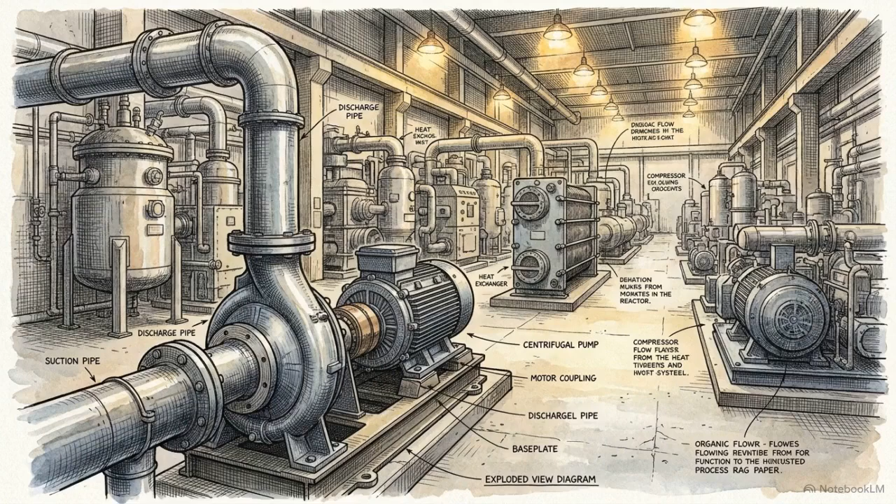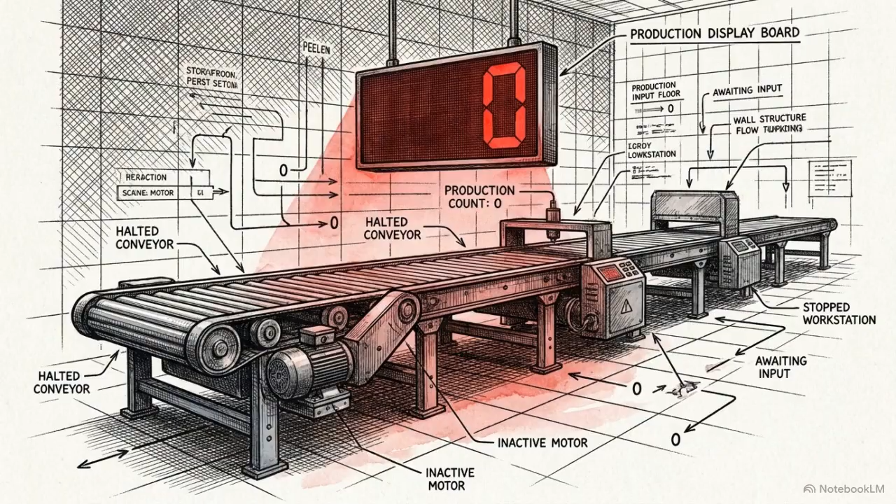Deep inside a process plant, a high-pressure centrifugal pump running at full load begins to vibrate. Within seconds, the vibration escalates, a mechanical seal ruptures, and the equipment suddenly halts under a cloud of pressurized steam. The immediate consequence is halted production. Every minute this pump sits idle costs the operation thousands of dollars.

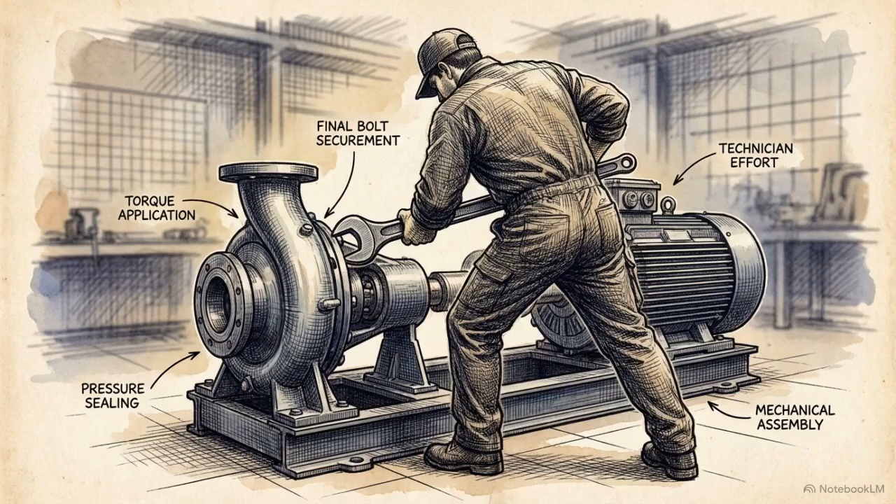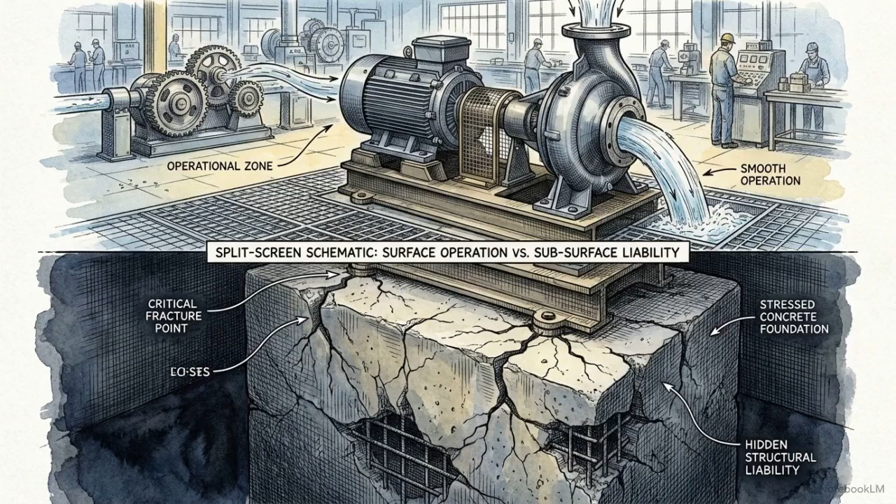A maintenance technician is dispatched, identifies a seized bearing, rapidly replaces it under intense pressure, and gets the line running again. Back at a terminal, the technician closes out the computerized maintenance work order. In the notes section, they type a brief, free text entry, repaired motor, or perhaps fixed pump. The immediate crisis is resolved. The machinery is humming, and operations resume.

However, the organization has retained a hidden systemic liability. By logging the event with vague, unstructured text, the maintenance department has created a mystery failure. The record proves that an event occurred and labor was expended, but the physical reality of why the bearing seized in the first place is entirely absent from the historical record.

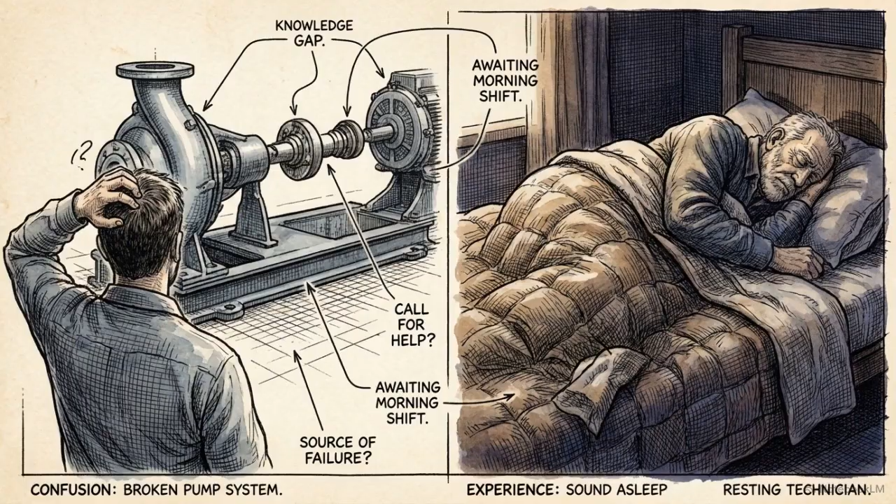When the next failure inevitably occurs on the same equipment, the team has no formal history to consult. Diagnosing the issue relies entirely on whether the specific technician who performed the last repair happens to be on shift, and whether they remember the specific state of that pump months later.

Combing through years of these inconsistent free-form notes to identify chronic problems requires hundreds of hours of manual labor. Engineers are forced to guess at patterns, basing their capital replacement strategies on intuition rather than physical evidence. This is the definition of reactive maintenance. A facility operating this way treats every breakdown as an isolated emergency to be fixed, rather than a mechanical failure to be studied.

To break this cycle, organizations must engineer their maintenance data. They must implement a standardized, structured failure catalog. A failure catalog establishes a controlled vocabulary for maintenance reporting. It is the required mechanism to convert thousands of isolated anecdotal repairs into an expanded, highly queryable database of mechanical truth.

The foundation of a functional failure catalog is a structure known as the Problem Cause Action, or PCA, framework. Rather than typing a paragraph, a technician must select codes that answer 3 distinct questions for every event. What was the observable symptom? What was the underlying cause? And what specific remedy was applied?

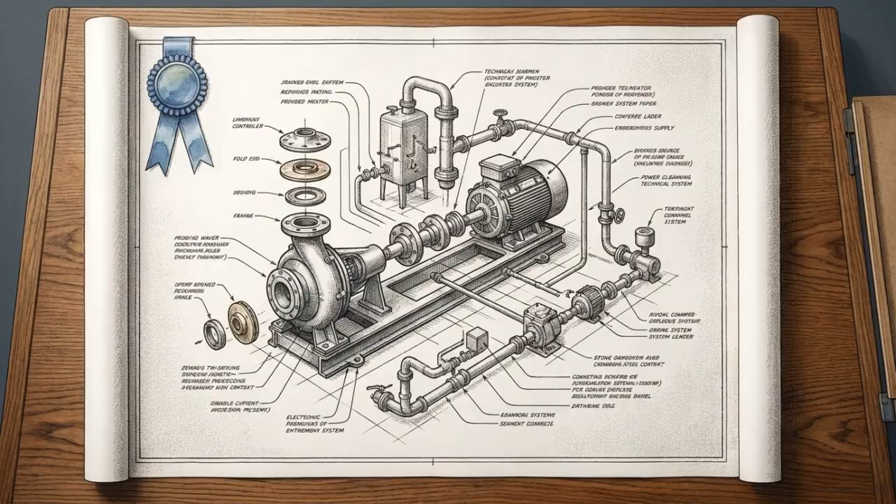While PCA provides the basic logic, true analytical capability requires a higher degree of granularity. To achieve this, the model must be expanded to align with ISO 14224, the global standard for reliability data, breaking the failure down into 5 distinct elements.

This animated diagram illustrates the first of these ISO elements, the symptom. This is the functional failure observed at the asset level, in this case, excessive vibration. The standardized code, VIB-EXCESS, slots into our data matrix to trigger the initial maintenance response.

The second element is the component. Here, the system identifies the drive end bearing, populating the matrix with MOT-BRG. By precisely isolating the failed subassembly, we geographically narrow the focus of all subsequent diagnostic efforts.

Looking at the internal cross-section extracts the third element, the damage mechanism. This documents the exact physical or chemical deterioration, in this instance, severe physical wear, coded as BRG-WORN.

Zooming out to the surrounding mechanical environment reveals the fourth element, the failure cause. We can see a severe misalignment at the pump and motor coupling. This environmental stressor generated the wear, resulting in the code ALIGN-ERR. This specific tag is the single most critical data point in the entire matrix. Identifying the underlying cause is the only way to dictate an engineering solution that prevents recurrence.

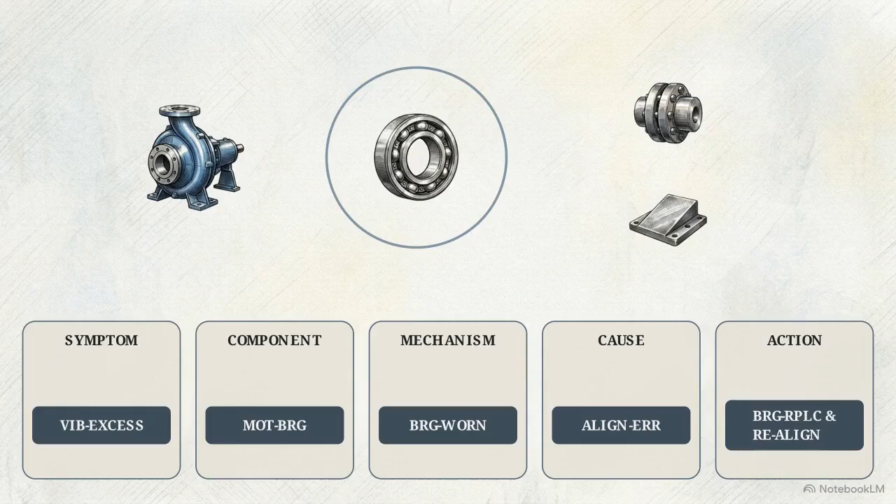Finally, the action completes the record. The technician replaces the bearing and realigns the base, coded as BRG-RPLC and RE-ALIGN. By mandating these 5 fields, a routine CMMS work order yields a multidimensional, heavily structured data point that can be filtered, aggregated, and queried alongside thousands of others.

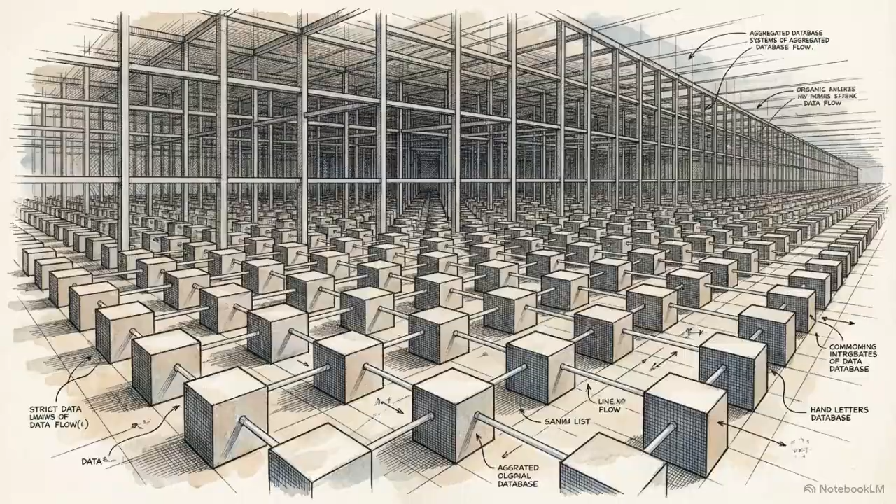Structuring the record enforces a strict separation between how a specific part failed physically and why the failure was allowed to happen systemically. This separation provides the visibility needed to isolate and address systemic failure patterns.

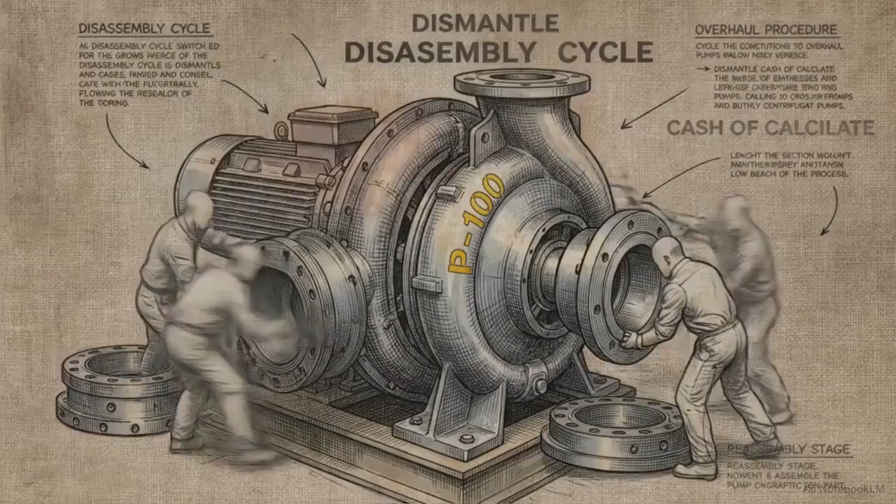To see how this data operates at scale, consider critical asset pump P100. Over 18 months, this pump suffered multiple chronic breakdowns. This timeline tracks the asset's history. At month 0, the pump suffered a bearing failure.

Because the technicians utilized the failure catalog, the data tag explicitly captures the root cause: improper lubrication due to degraded oil. At month 6, the pump fails again. The same bearing is destroyed, but the coded data tells a different story. The ISO tags trace this failure to a slight base plate misalignment, putting excessive load on the shaft.

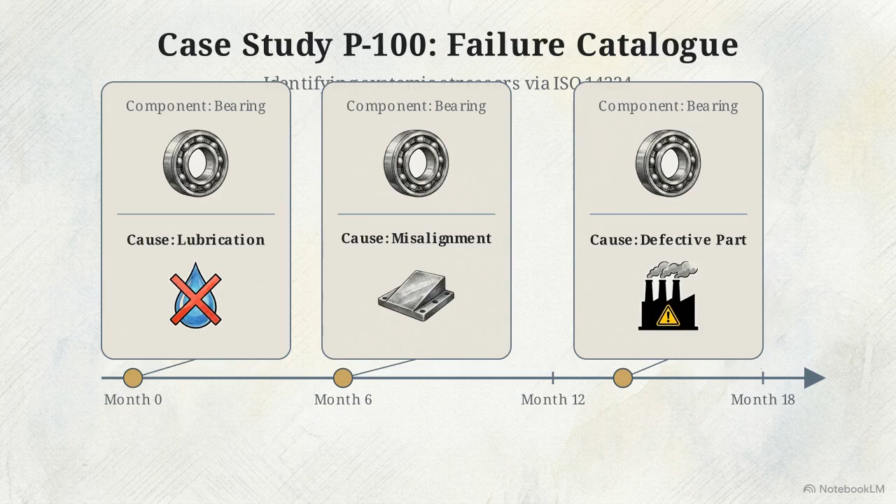At month 14, the bearing seizes completely. The coded data shows lubrication and alignment were perfect, isolating the cause to a defective manufacturing batch from a supplier. If this facility relied on free text work orders, the maintenance log would simply read, "bearing replaced 3 times." The varying environmental and systemic causes driving those replacements would remain entirely hidden in the text.

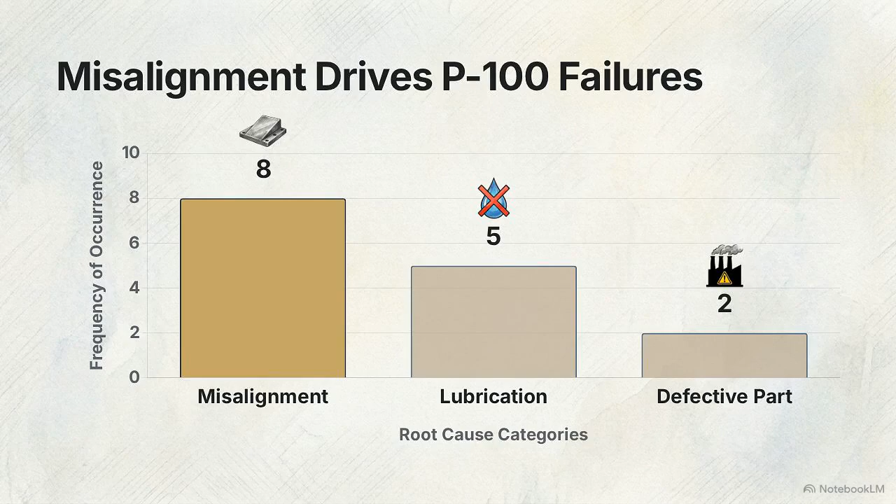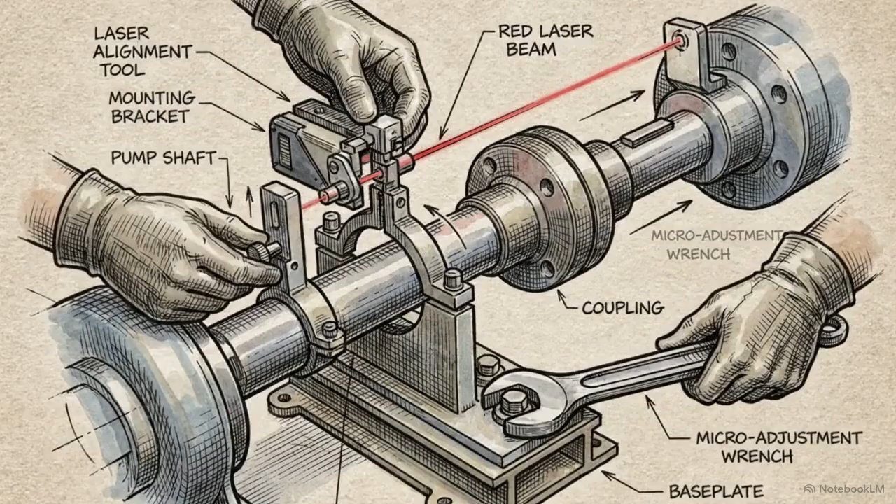By utilizing a standardized taxonomy, the reliability team can bypass manual review and algorithmically map the asset. Here, this Pareto chart automatically sorts the timeline data, precisely breaking down the varying root causes attacking P100. The visual evidence dictates an immediate business response. The reliability team implements a precision laser alignment protocol for all pump overhauls and installs online temperature sensors to catch lubrication degradation before it destroys the bearing.

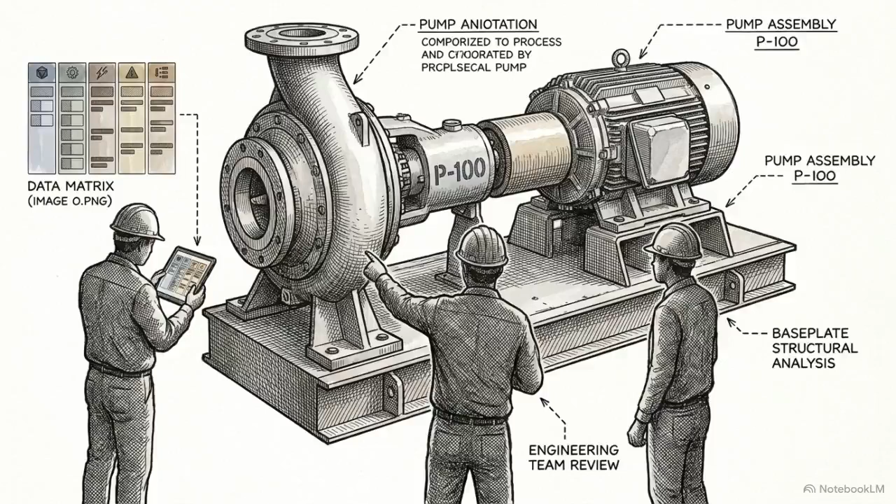Structured data ensures the maintenance department does not simply stockpile spare bearings to prepare for the next outage. It forces them to address the physical reality of the machine. Gathering this caliber of intelligence requires absolute uniformity. A failure catalog only works if the code library is comprehensively standardized across the entire enterprise. You cannot have one facility classifying an event as seal failure while another codes it as leak gasket.

To enforce this standard, organizations must establish a cross-functional governance team to oversee the exact definitions of every code in the CMMS. When building the initial library, this governance team relies on a tool called Failure Mode and Effects Analysis, or FMEA. By systematically evaluating how a component can physically degrade, engineers can map out the precise codes needed for the catalog. FMEA allows the organization to seed the library with failure modes that haven't even happened yet, guaranteeing the system is proactive rather than strictly historical.

A failure catalog is a living operational document. Without strict, ongoing governance, the library will decay into an unwieldy, chaotic list of overlapping definitions, rendering the data completely useless for macro analysis. Once the data architecture is secure, the focus shifts from diagnosing single assets to monitoring the reliability of the entire plant.

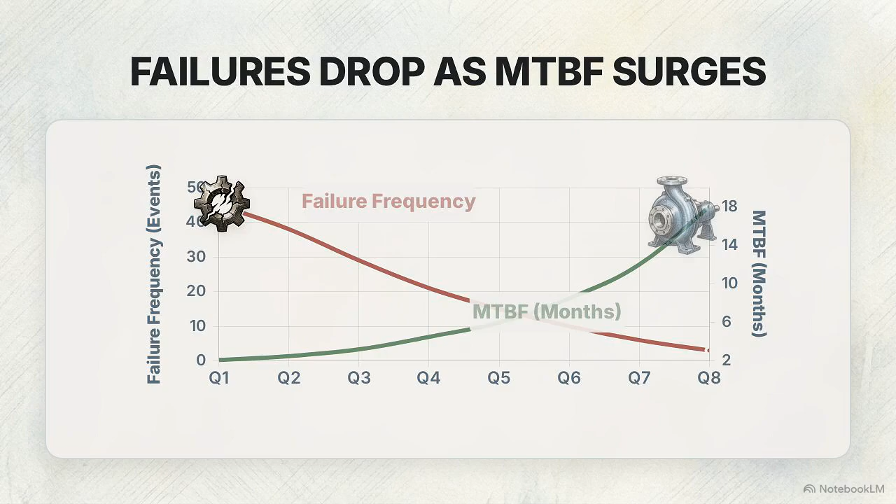This line chart demonstrates a measurable reduction in recurring failures. By targeting the exact causes of bad actor equipment, repeat breakdowns drop over time. Conversely, a secondary chart plots the resulting increase in mean time between failures. Critical asset classes operate for continuously longer intervals. The final metric is the Data Quality Index, which tracks the percentage of work orders closed out with complete and accurate failure codes, proving the organizational culture is maintaining its discipline.

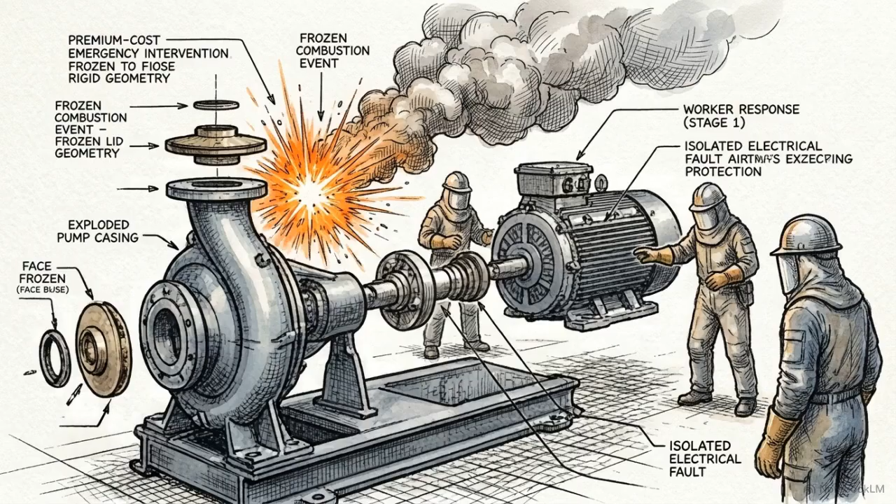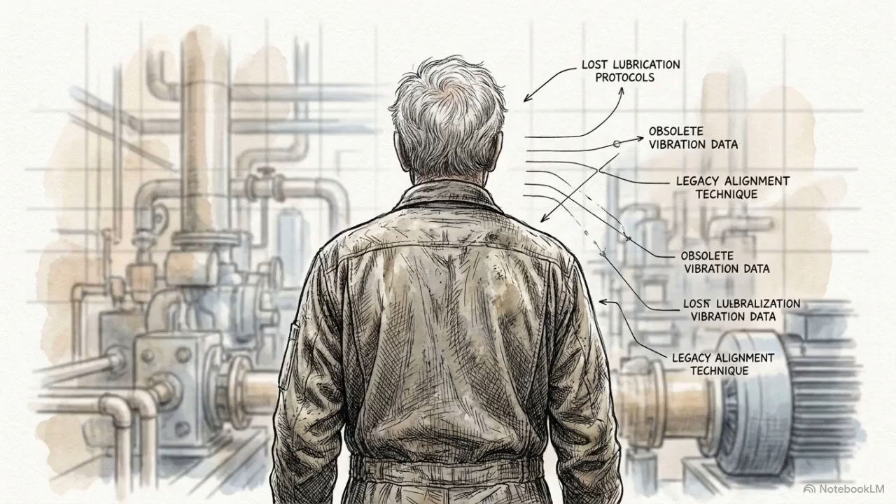The financial result of this discipline is a structural shift in budget allocation. Maintenance spending transitions heavily away from premium cost emergency interventions and into highly predictable, scheduled planned work. Furthermore, the structured database acts as a permanent organizational memory. The nuanced knowledge of how a specific pump fails is no longer tied to a senior technician's memory. It survives employee turnover and remains permanently accessible to the newest hire.

By aligning this data structure with global frameworks like ISO 14224, the operation ensures its history remains compatible with evolving asset management systems and enables seamless benchmarking against international industry standards. Engineering maintenance data provides the evidentiary baseline required to move an industrial operation from repeatedly fixing symptoms to systematically identifying the roots of mechanical failure.